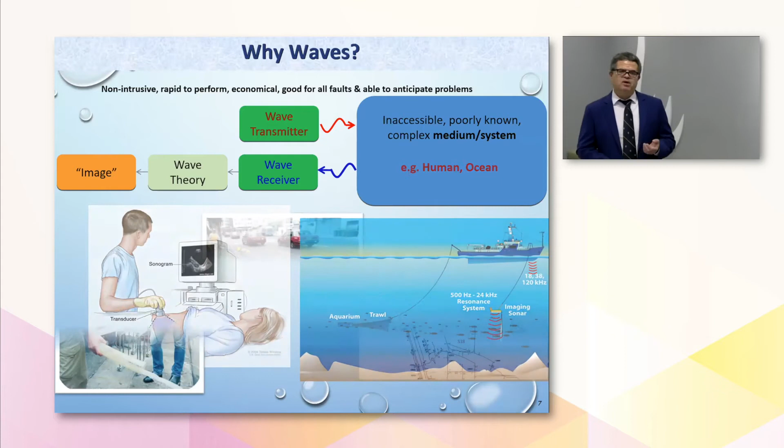So the idea was, can we do the same in pipelines? These pipelines are important, they are costly, they are large in scale, yet our waves are fast. They go at 1 kilometer per second. So that means in 1 second, we could actually get a large sample of echoes coming back. The idea is then, can we develop the wave theory and the imaging to turn that into knowledge about the system? And that's really where our project has been in the last 5 years.

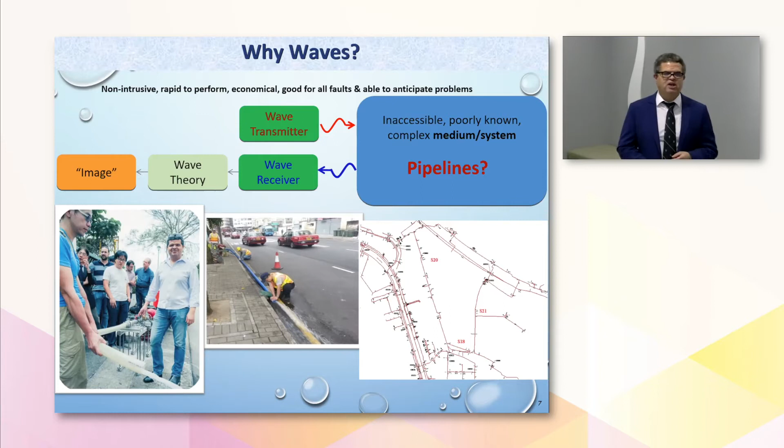So the mission was to understand these waves and how they propagate in pipelines much better than we have before, then to turn that into new and novel diagnostic techniques. And of course, we needed to develop the experimental methodologies, labs and field tests to confirm where we are. So where are we in all of this?

When we started, you do what you usually do, what you know, and you try to build on what you know. And we did that, I think, for about a year and a half. We were progressing, but frankly, I must admit, we were not progressing at the rate I wanted to achieve all of what we promised to do. So we needed a fresh look. We really needed a paradigm shift. We needed to think of these things in a totally different way.

So of course, you want to then see what others have been doing in other fields. So it occurred to us, what are these people doing in ocean imaging, in medical imaging? What are they doing in ocean acoustics?

And one of the common things that keeps coming back is the time reversal of waves, which we have not in our field attempted at all. So we had to learn. It became a mission in itself. It was lots of fun, a bit of divergence for a while, but then we had to prove it. We had to prove it theoretically, we had to prove it experimentally in our system. And we have by now.

Our pipes come in different sizes, they come in different materials, and we have to show that it works on all of them. And we have a lot of damping in our system. And damping, what it means is when you do diagnosis, when you do imaging, it blurs your image. So we don't want that. So we found a way to compensate for that damping, and that is now published.

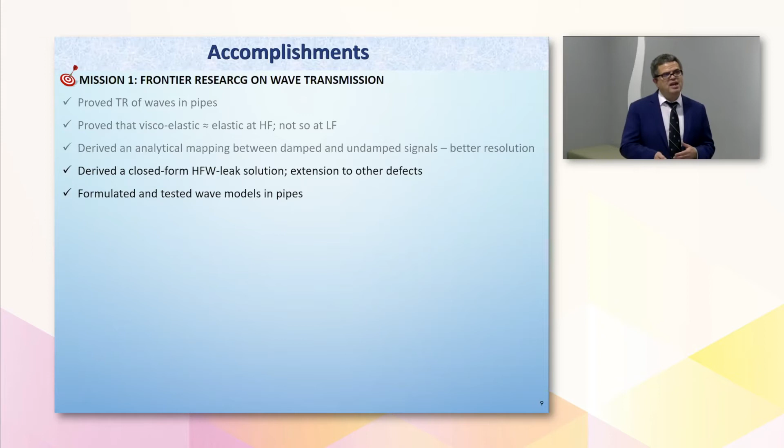When we started, there was not really much work being done on high frequency waves and pipelines. So we had to develop a lot of these theories from scratch, and we have. Whatever we developed here, we tested them both numerically and experimentally. Noise is a killer when you're doing diagnosis, and we now have a good understanding, much better than when we started, about noise and noise distribution.

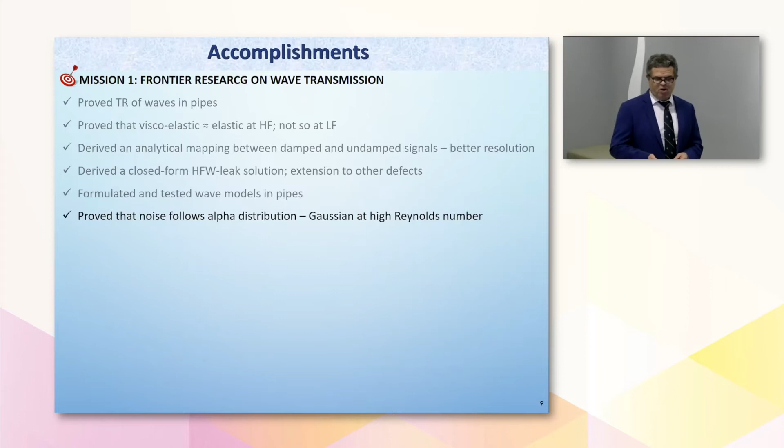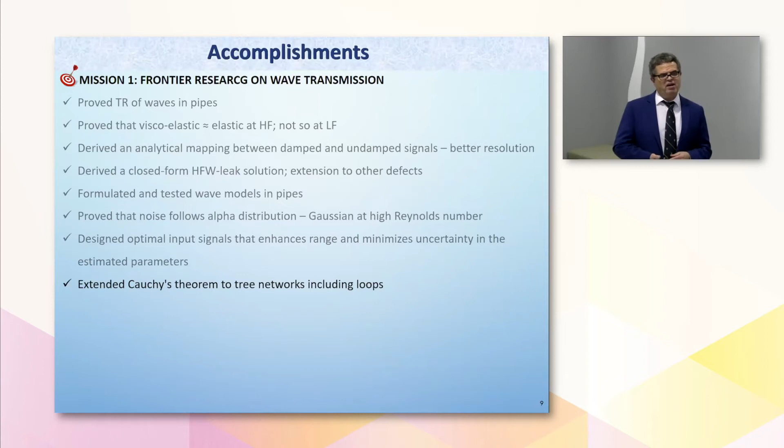It matters what signal you probe with. Not all probing signals are the same, and we've done quite a bit of work on that, and it's been highly beneficial. When we started, even from a mathematical perspective, a lot of the theories had been done with the ocean in mind. The ocean is one connected region. Pipelines are a network. So we had to make things fit our application, but luckily we have a number of mathematicians with us to help us move forward.

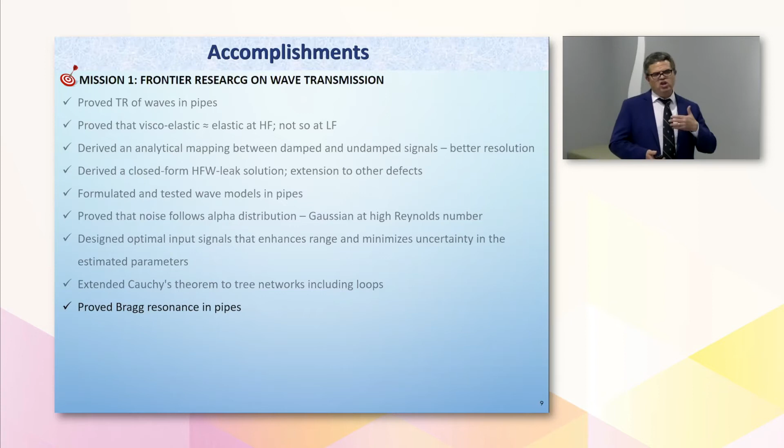We also proved that Bragg resonance is common in pipelines. This gave us a way to look at rather complicated signals and have much more insight into them. Now, putting all of that together, we are able to come up with a unifying framework with which to image at varying frequency. We have proved in the last 5 years that it is optimal in the sense of signal to noise ratio. It's robust, it's efficient, high resolution, versatile. It's no wonder it is being used in other fields.

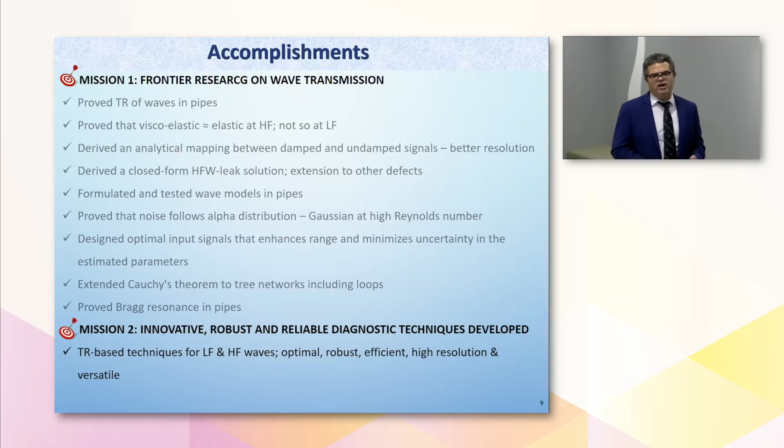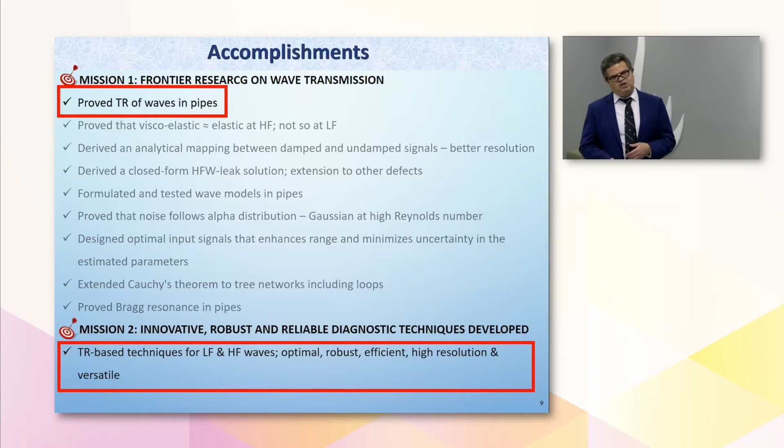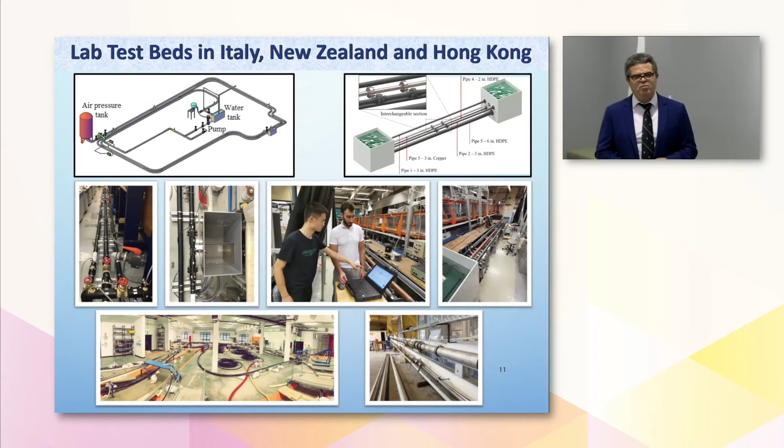We also built facilities in University of Perugia through our collaboration, and this is in University of Canterbury in New Zealand. Another signature that really came out of this is the close working relationship with Water Supplies Department. I thank them dearly for all of their support throughout. They gave us this testing site. This is in Beacon Hill in Hong Kong. This is a water supply reservoir. They have some space here. So we talked to them, they gave us the space, and now we built the pipeline around this perimeter.

These are some pictures of it. It can be about 250 meters long. We can do networks, we can do branches, we can do all kinds of testing in this facility. Interestingly, our colleagues in water supplies are already using this to train their engineers to detect leaks through listening. So they've been using it.

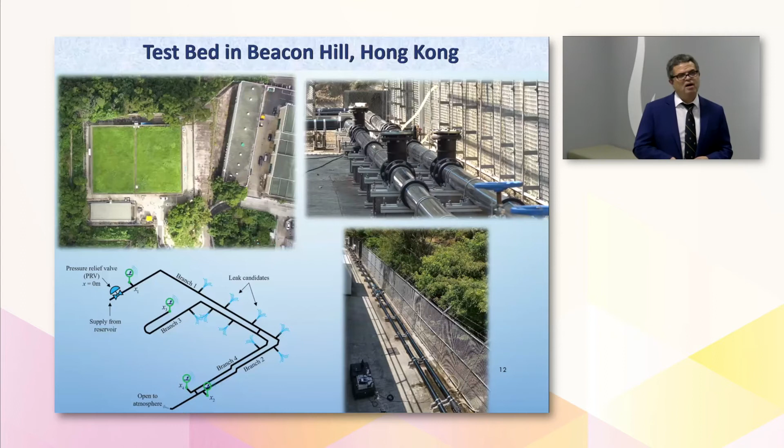So with the addition we have now, our vision together with water supplies is to make this a center, a place where smart water technology, all the new developments, can come in and be tested, whether it's ours, whether it's others, whether it's from different places. So hopefully we can develop this in Hong Kong. It's connected to the water supply. We're happy to have this major facility. It wouldn't have happened without the close working relationship with our colleagues in water supplies.

They were able to give us 3 tests in the field. So we test in 3 places in Hong Kong. We also have 2 tests that were carried out in Italy, and I'll show you the results of those. But now going back, as I said, one of the new things that really happened here, and we didn't even expect we'd get there, is this idea of using time reversal. We were not aware of it at the time of the application.

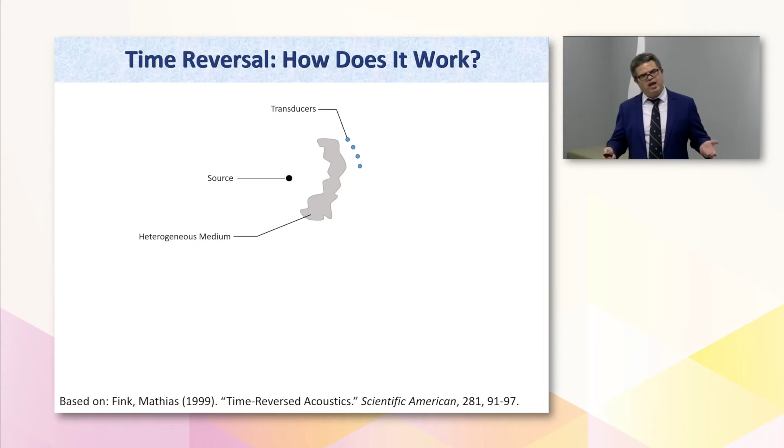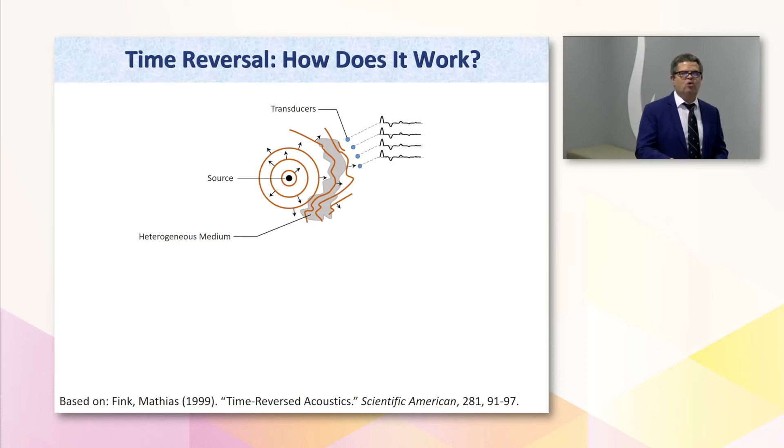So when you have a wave, there is a wave source. That wave source could be a stone. You throw a stone on a pond and you get ripples. So these are the type of ripples that all of our eyes are used to. And imagine you have a sensor, you could be collecting the pressure at 3 or 4 locations here. The principle of time reversal tells you, you take what you measure there, you flip it in time.

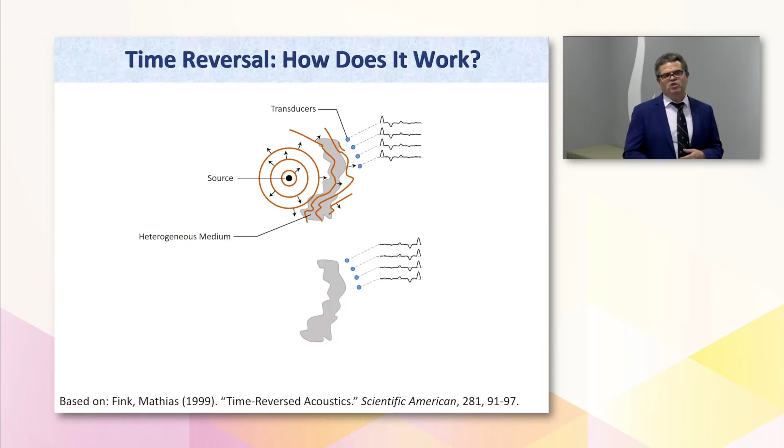That means you send last in, first out. You change the chronological order. This becomes your source. And if you make those your source, one intriguing thing about the waves is they refocus back in their sources. They tell you where they come from. They go home. And how sharp they refocus is actually inversely proportional to wavelength. So that means if you use higher frequency, you get higher resolution, you get more sharpness into it.

But of course, for us, high frequency means more damping. So we had to play this to optimize. We build our project around low, high frequency, and I'll show you more of this. But this is really intriguing. You can find this on the web. It's an experiment that was done in Brazil to show time reversal in something we can see, we can visualize.

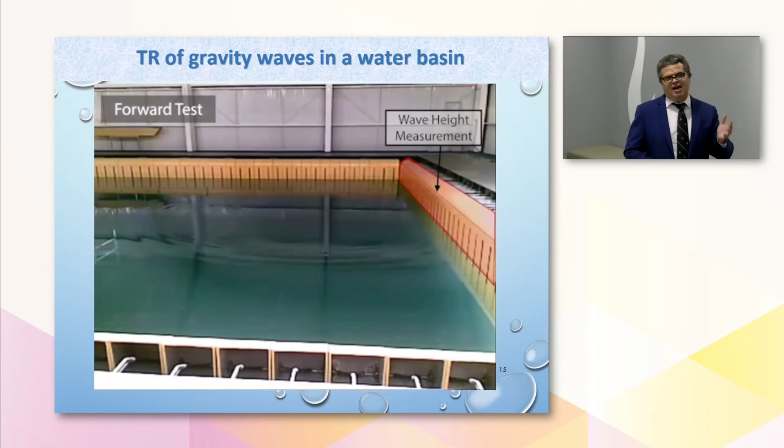So they're going to drop a stone here from the ceiling. The stone comes down, it generates ripples. And what they did here is measure the pressure or the water elevation at a couple of places. Okay, so nothing really earth-shattering about that. We all would expect, you see, there's a stone, there are ripples.

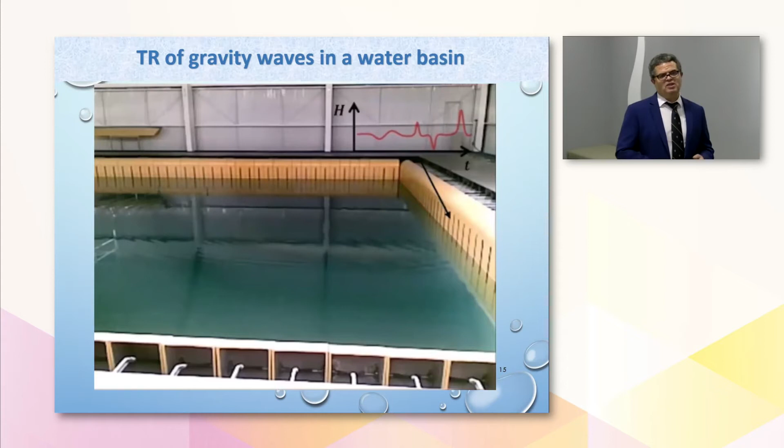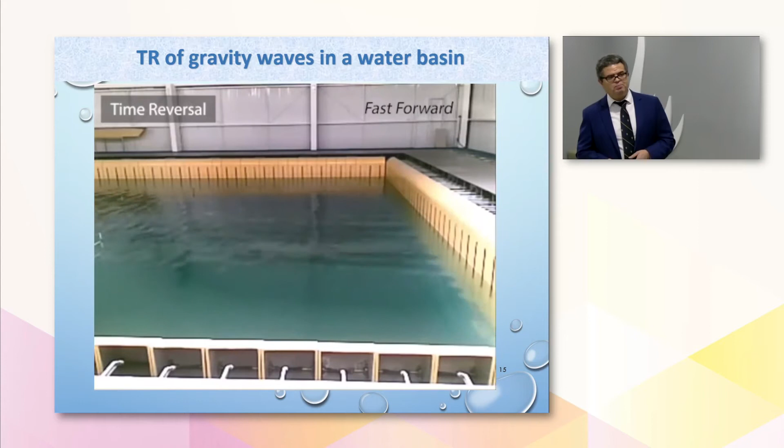So the intriguing part is now what they're going to do is they're going to take whatever they measured, they're going to flip it in time, and that becomes the source. And just bear with me because the end result is really worth it. It's cool. So now these become the sources, what they measured. Okay, we're going to speed through this video to gain a bit of time. We will slow it down when it's doing what waves like to do when you send them back. So observe what happens.

Okay, the wave refocuses back. You see the water splashing where the stone used to be. So it actually tells us where the stone went. So what it meant to us, seeing things like this, is that if I'm standing here and measuring, and let's say you plunge in a pool or you threw something in a pool, I don't need to know where you are. I could measure and send back and find you and find the source.

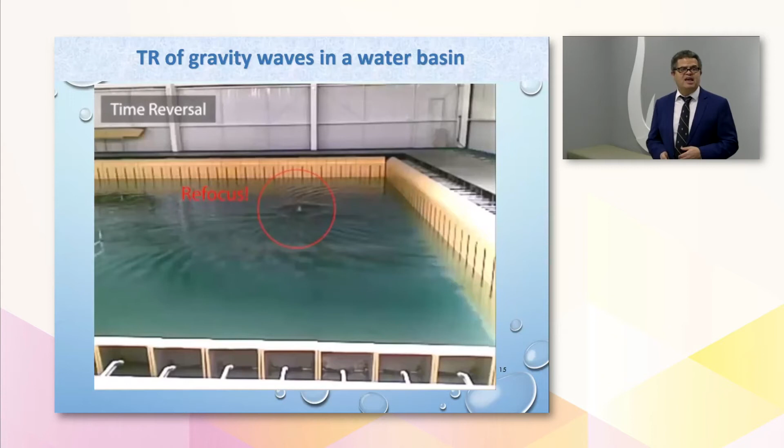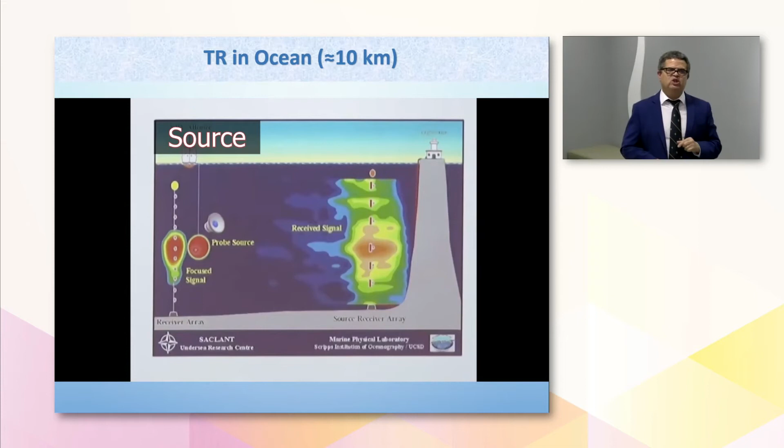And this is an experiment, I believe it was done in the Mediterranean. They send a wave from here to about 10 or 15 kilometers away. And what they send is a short blip, a short compact source. So we'll hear in the video the blip. See, very short sound. Now you will hear what they're going to receive about 10 kilometers away.

A very elongated signal, what we call echoes. You know that when you speak in tunnels, you get echoes. Why are there echoes? Because waves go directly, but also waves zigzag up and down to get there. So there is a spread, what's called dispersion. Now, this is very nice to us because this could be thought of as the pipeline. This is our water. These are the walls of the pipe. And we have these, as I will show you later.

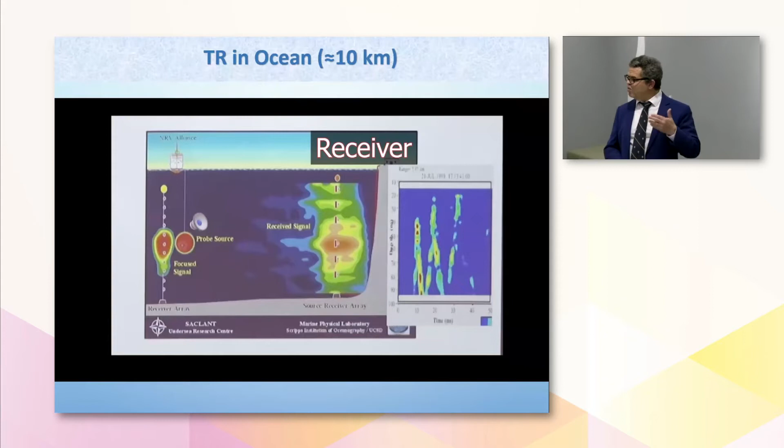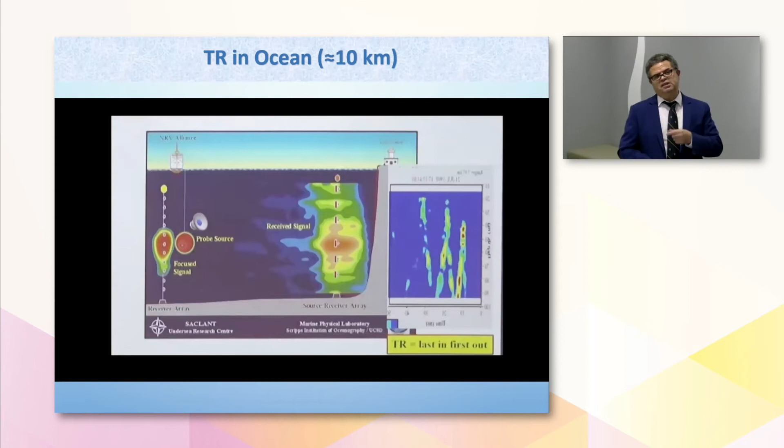Now, notice what happens when they time reverse this. Okay. So they took what they measured here, they time reversed it. Now they're going to send it back in the ocean. And you see, you get the compact source. So the source refocuses again, collapses into a short period at 10 kilometers away.

What it means again here, if there is a whale here singing, and I'm measuring elsewhere, I don't need to know where that whale is. I could just measure what I get, reverse it, and it would locate it. So these are great at locating sources, and that's what we are after in this project. So we've done this with many experiments, but I'll just show you one. Here's the pipeline at Beacon Hill.

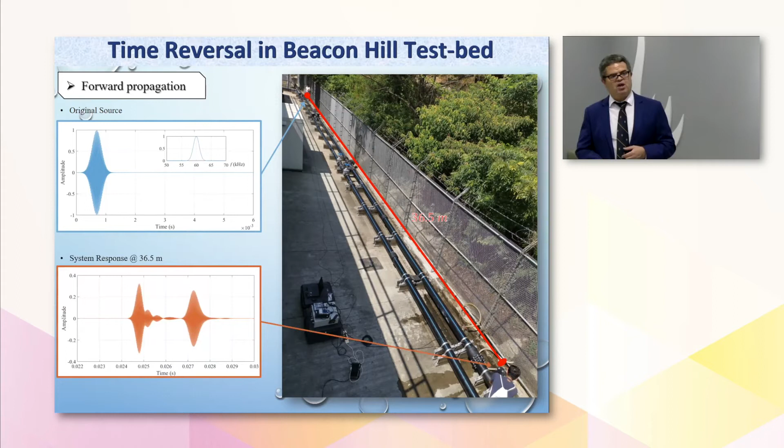We send again a short burst. We measure at the other location. You see, we get the echoes. We get that signal spread in time. So now we time reverse it, send it back, and we get the refocusing exactly at the location, but we get these side lobes.

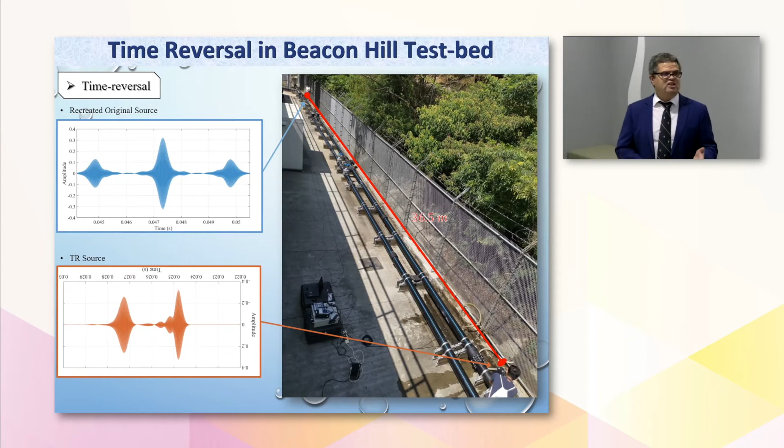Anybody in the audience who worked on this or as a scientist will know these are the artifact of the fact that you don't measure at every point, or you don't measure long enough. So these are what we call side lobes. In fact, maybe you didn't pay attention, but we've seen the side lobes already.

This is the focus. We know where the stone is here, but you still have some ripples. So if you want to get rid of these in these experiments, you measure at many more points and you will see only the stone and everything will be quiet. What it means is, if we want to get rid of this in practice, we need to measure at more places, but our system is not accessible. So we have to deal with these side lobes.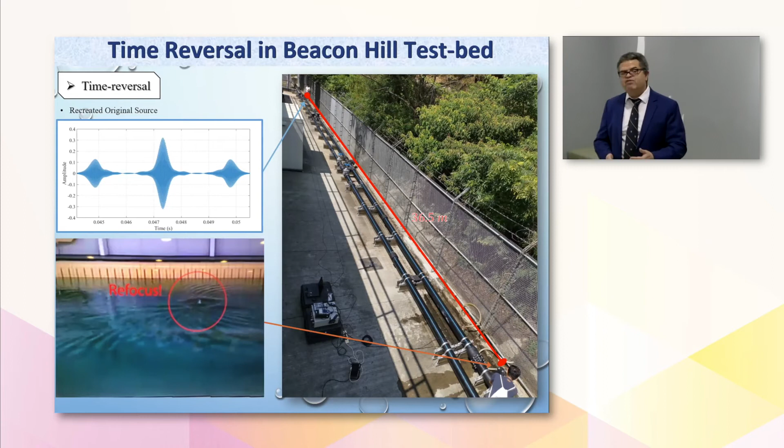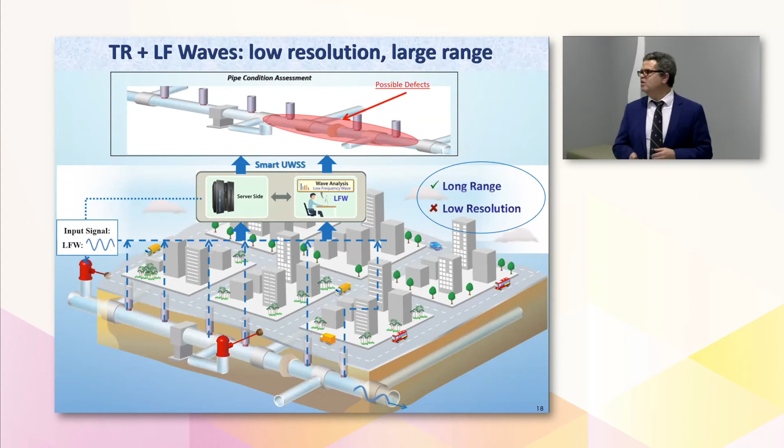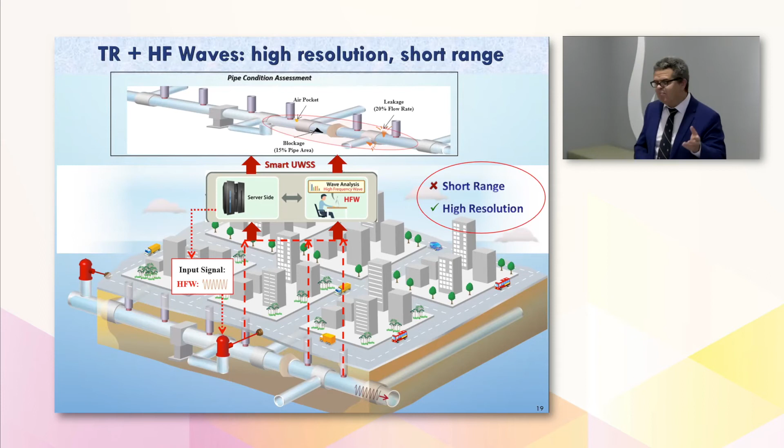So now that we proved time reversal for us, let's see how we test it. And we're going to split this into low frequency and high frequency. Why low frequency? We send low frequency waves because they have long range. We can test kilometers of pipes in a few seconds. Though, low frequency has low resolution. That means we can only tell defects within tens to hundreds of meters. The idea then, once we are close to where defects are, we go in and hit it with the high frequency, and we will be able to precisely determine, well, now we're getting to the order of centimeters. So let's see how we work with low frequency time reversal.

This is a test that we've done in the field in Hong Kong, in Ma Tau Kok. I think this was about 700 meters long. Send a wave, receive. Please notice we only need to collect about 0.6 second of the sample. This is, by the way, all automated now. Get the data, it all goes to the computer. The time reversal gives you the image, like we're trying to emulate what that doctor was doing with a patient. And our patient is our pipeline. So we want to see what is inside it. We see things that are already there, connections and so on, and those all show up in the time reversal, but we see new things.

We saw a hydrant line that was not on our maps. So we contacted our colleagues in water supplies and they confirmed that indeed there was a line there, but it was not on our maps. Well, they had a pressure reducing valve. We knew they did, but they told us it was out of commission. In one of the tests, we believed our results were telling us it's working, something is happening. So we contacted them and indeed they confirmed that it was back online. So the point I'm trying to make here is this is not just a leak finder. It's actually a way to map the whole system, to find junctions and so on that you didn't know, to tell you whether your devices are working or not, and to determine new defects.

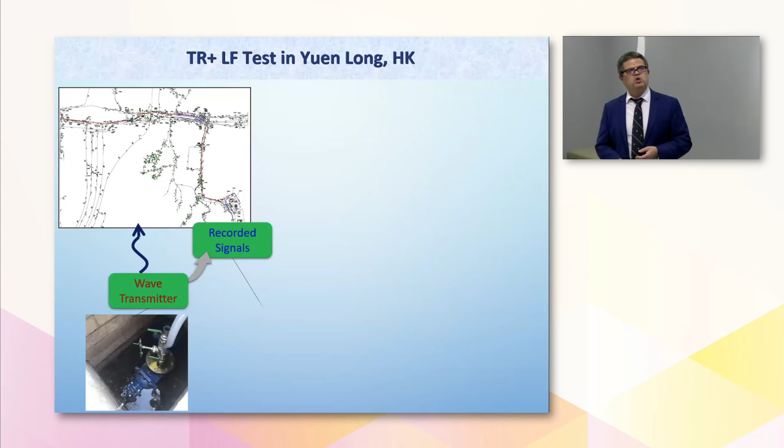Right? So we tested this also in Yuen Long in a 1.5 or 2 kilometer pipeline. Again, send the signal, receive, do the process and get the image. And in the image there, we suspect that there are 2 leaks. We are talking to our colleagues in water supplies department to confirm it. Of course, we need to dig. To dig, we need to get permits. This is a major highway, and we haven't done that, but that's where we are suspecting that there are 2 leaks. They suspect there are leaks as well.

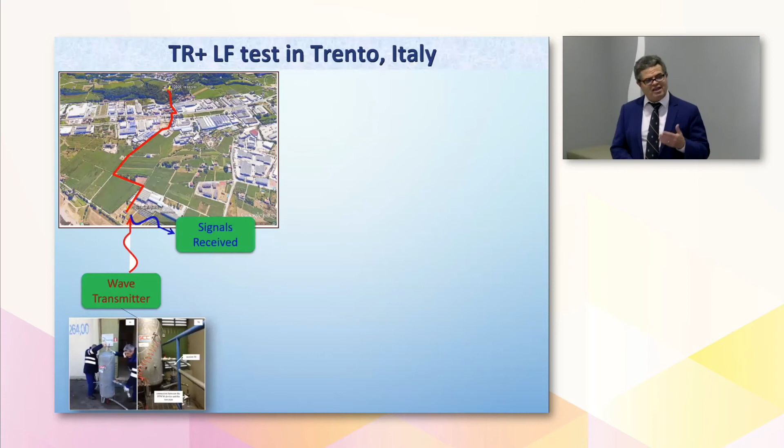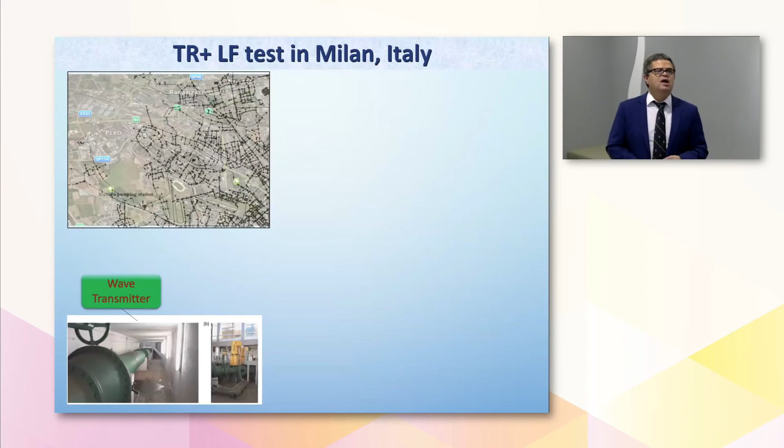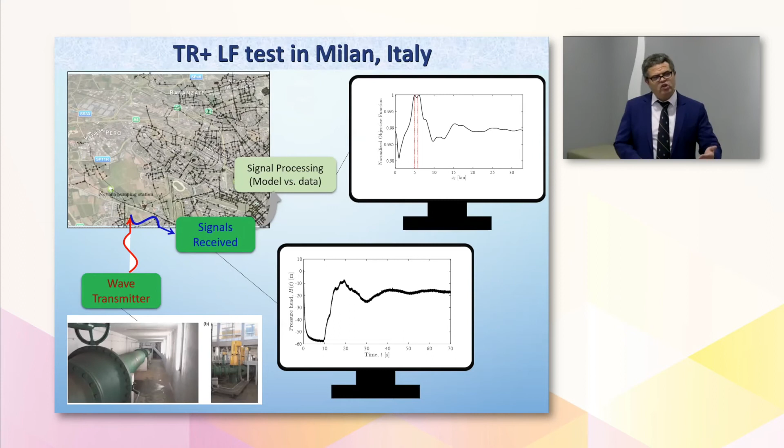We got data from Trento in Italy. Our colleagues collected that and sent it to us. We applied our methodology. We detected there is a leak and an air pocket. In this case, it was actually verified in the field. This data actually predates our project. It was done in Milan over about a 10 kilometer distance. But we want to see the range. So again, we tested it and you see we get the double peaks. These double peaks imply that we have multiple defects. And in fact, when they dug in Milan, they found a number of leaks bunched up together.

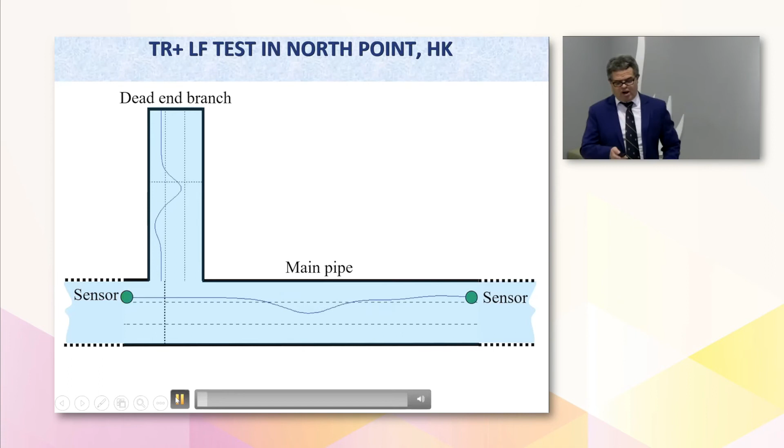This is another interesting one. When we were just early on the project, the water supplies was collecting real data in North Point in Hong Kong, and they were seeing each day at 4 o'clock a drop in pressure. And the question is, what causes it? What is the source of this? So once we got these ideas of time reversal, we said, let's play. If we have something like that, what will happen? So now we just play it backwards.

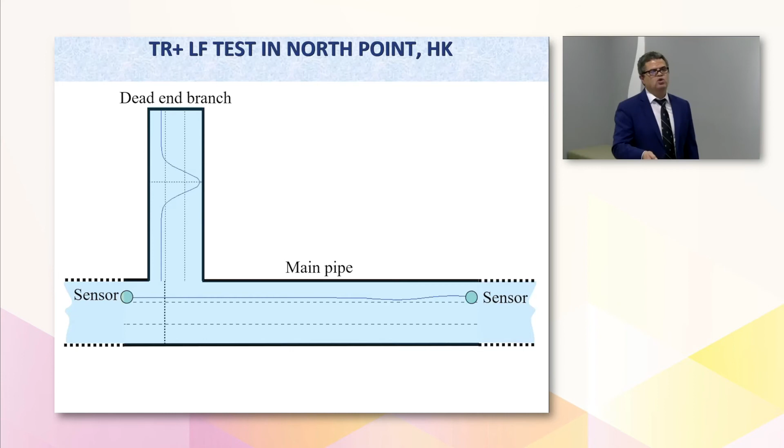Okay, we do the time reversal and we'll watch where it refocuses, right? And you see, this is where it refocuses. So to us, it tells us that's where the source must be. And then we need to check. And in fact, in checking with them, it was confirmed. So this is where we would predict. It was confirmed that indeed there is a government truck that comes around 4 and fills up with water.

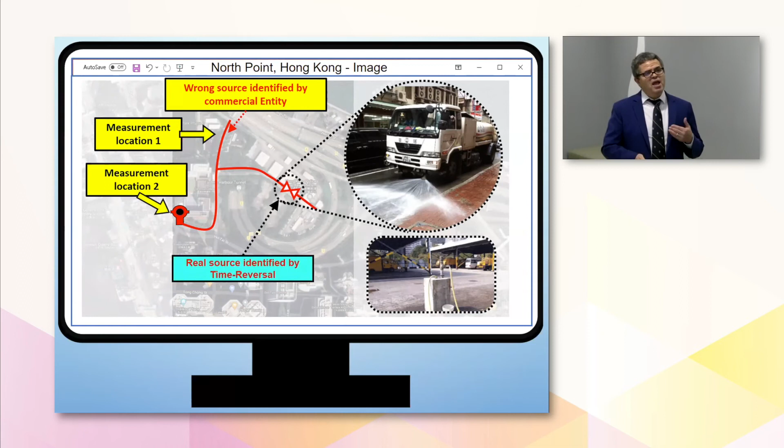So every time it fills up, there is a drop. So again, here, this is not a leak finder. It's finding somebody who is tampering with your water and so on, where it could be used. But again, the limitation here is that with low frequency, you can only tell to within tens of meters. It's costly to dig within tens of meters.

So we want to get closer. We want to get to the order of a fraction of a meter, hopefully. And that's where high frequency is. So we tested it, and this is the test we've done. We wanted to see how closely we can detect this opening, and it can be of the order of centimeter. Interestingly, we also detect this support here. So that means we can separate two defects that are even within this distance, right? That's what this resolution allows you to do.

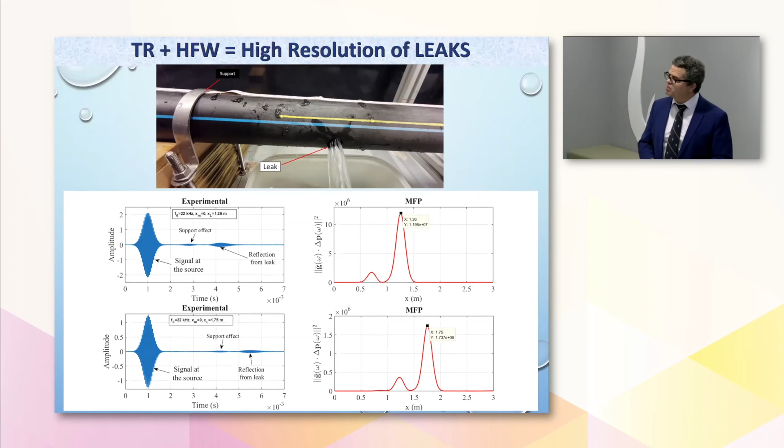The other important thing in practice is these supports. Whenever pipes have these supports, they're gonna wear off with time. So if we do this test and we see changes in this peak, it tells us that there are some problems about to occur. So it's better to find these problems before they occur. We wanted also to see if we can find junctions with these high frequency waves. Can we actually localize the junction?

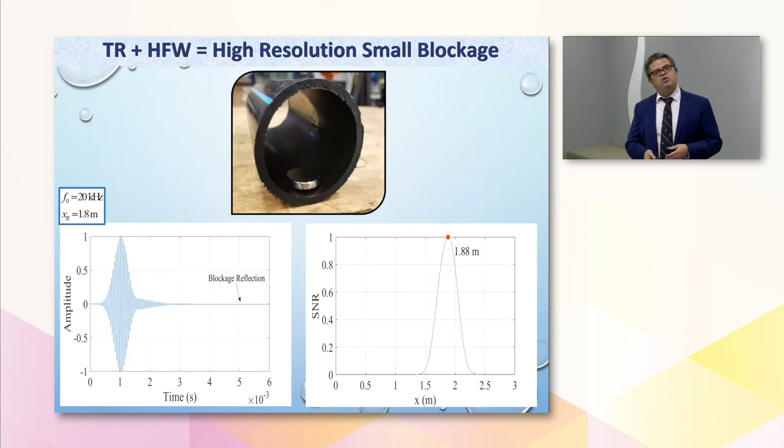Problems also occur inside, as you saw in the earlier picture. You may have noticed there is corrosion. So we want to see, can we localize things that are as small as a magnet here, which we did. We also asked our colleagues in water supply, they gave us lining from a pipe. So we put it here and we can find it again to the order of centimeters. So this is a way of telling us in the future that we don't need to wait for the pipe to crack to say, oh, something has happened in it. We should be able to hopefully see problems when they start to occur, when these linings start to peel off.

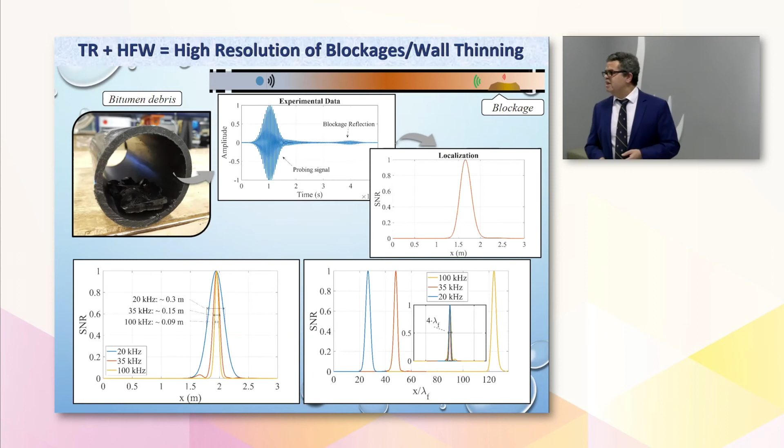So through the work we've done in the last 5 years, we have 8 test beds that we developed. We have 1 patent filed and 3 in progress. We have been working very closely with the Water Supplies Department, as you've already seen evidence for. We have labs together. We are testing in the field together. In fact, we got a project recently from the Drainage Services Department because they have 200 kilometers of pipes that are also pumped. So we've been trying to apply some of this knowledge there.

We developed fundamental knowledge that is encapsulated in 80 journal papers, 30 conference papers, and 30 theses and reports. We trained 27 PhD students, 18 postdocs, 20 FYPs, 5 high school students spent some time with us, and 10 MSc students. These students and postdocs, some of them are here, but they are now everywhere in the world, right, making their own impact.